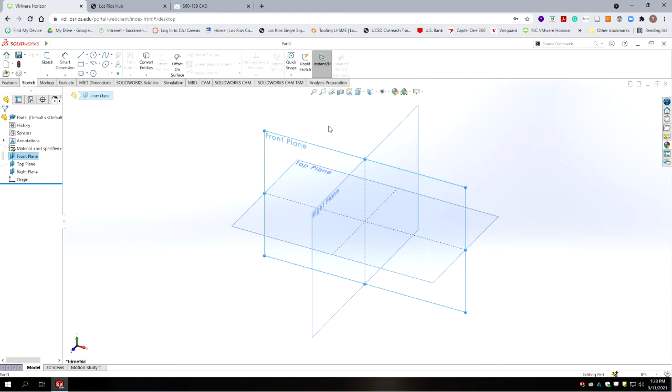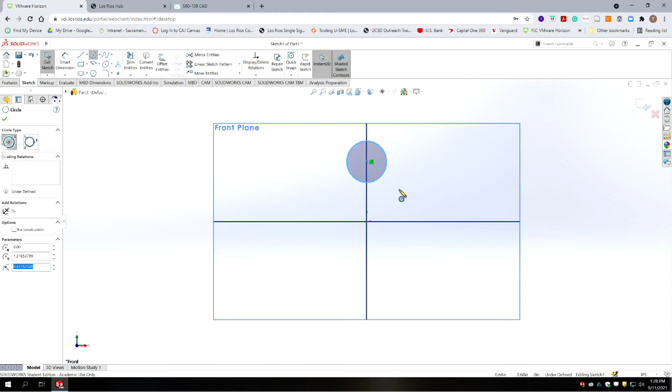Alright, so we're going to move on to the next step here. So let's open up SolidWorks. And we're going to create a new part file. And we'll make our planes visible. And we're going to sketch on the front plane as our primary. And I'm going to start with a circle. I'm going to put that circle up at the top. Okay, that's going to be top of our tapered part. And make sure it's snapped on the plane that intersects.

And then we're going to draw a line that intersects the base plane and comes up. And if you hover close to the circle, you'll see a yellow tangency symbol show up. We want it to be tangent. So hit escape, and we're going to duplicate that line on the opposite side. I found it's easier to get the tangency symbol to come up if you're not trying to draw the endpoint to the circle. So you go past and then we trim it.

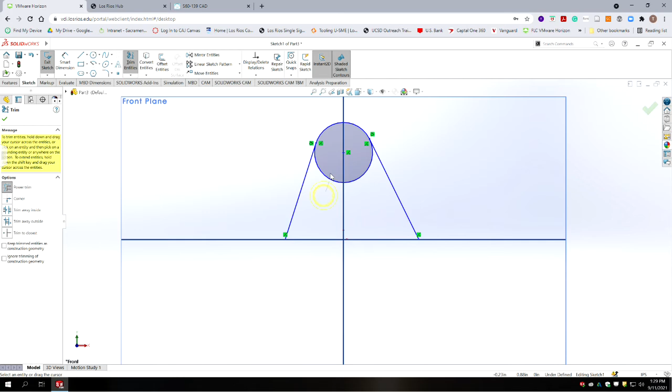Alright, so why don't we go ahead and do that. We'll trim off the ends of those little pieces. Okay. And I guess we could trim off the center too. Okay. Now, we want this to end up being symmetrical. So we already have the center of the circle symmetrical. If we put in a relationship between the two endpoints of the arcs so that they have to be horizontal, that's going to force the symmetry with the angle.

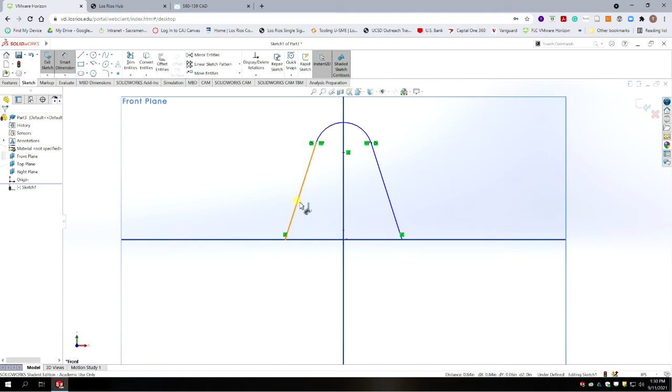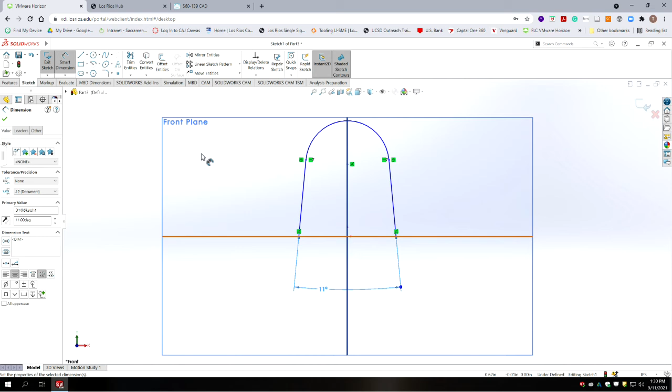Okay, and then we're going to put in our angle, which according to our drawing is 11 degrees. So we're going to type in 11 degrees. Okay. Alright, now I need to make a line from end of each of the angled parts, and we should get an enclosed volume. Now the dimensions are all off, but we've got basically our perimeter. Now we just need to put in dimensions.

So we're going to put a dimension on the radius here, and I'm going to go back to our drawing, and it's 240 thousandths radius. 0.24. It's going to get significantly smaller. And then the other dimension we need to constrain is however it's dimensioned to the height, and it looks like the overall height and the height of the center of the hole have a different level of precision. And that is partially because this could be made as a casting. So you wouldn't want to hold the outside position as tight as where the actual hole is.

So we're going to go ahead and use this 1.830 for this arc, but we want to make sure that we don't make a concentric relationship between the higher precision holes and that arc, because in reality we have a lot more freedom of tolerance on the arc, and they don't have to be concentric for the function of the part.

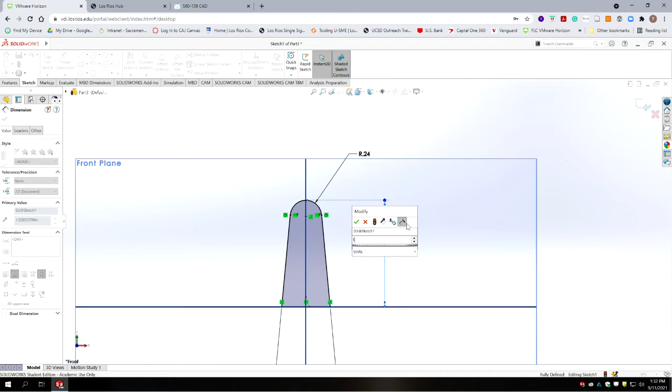Okay, so 1.83 is our height. We're going to go from the base, and then we're going to hold the shift key down, which allows us to select the tangency point of the arc. Otherwise it's going to go to the center. So we're going to do 1.830.

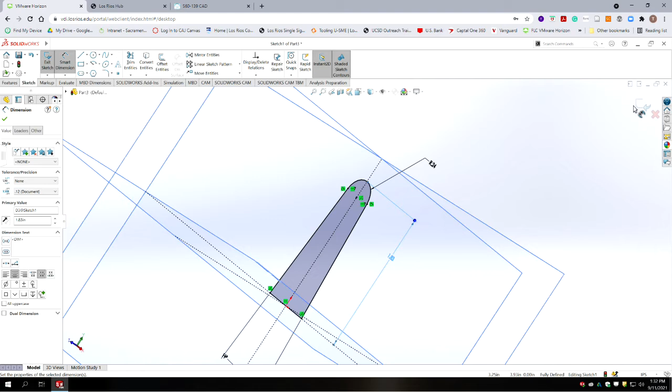And we get our overall height. Okay, so that's our base extrusion. And in this context, this time I want to have symmetry set up with the overall thickness of our extrusion. So we're going to hit accept, and we're going to highlight the sketch. We're going to go to features.

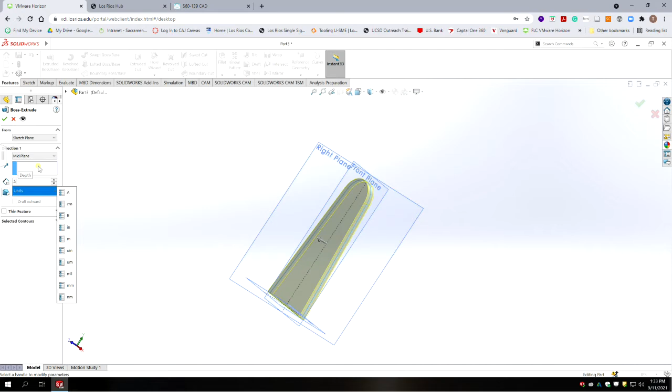We're going to do our extruded base, but instead of doing blind, I'm going to say mid-plane. So it puts the center of our extrusion on the plane the sketch was drawn on. And then we're going to put in our thickness of a 1/2 inch. And so the overall thickness should be a 1/2 inch divided on a midplane. Okay, and we're going to accept that extrusion. And now we have our base extrusion for the part.

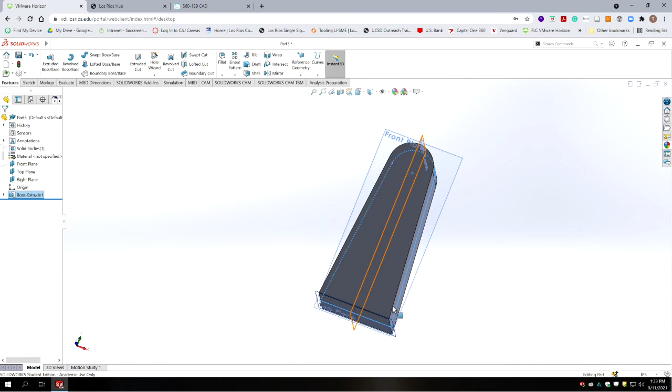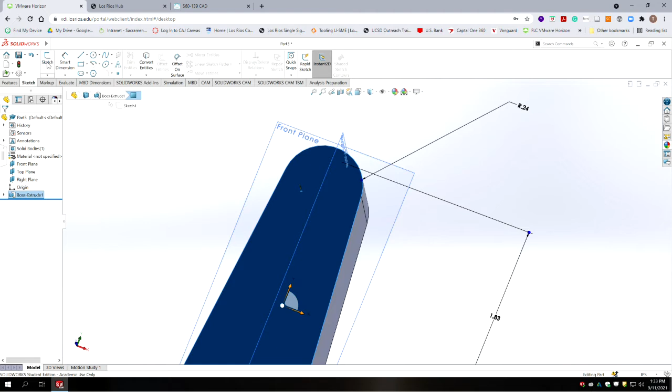Now you could choose to approach this by doing a variety of different things. We can put the hole through the front face, or we can put the holes in the end. I'm going to finish off what's in the front view, and then we'll work on the back view and then the base. So we're going to go to sketch, and we're going to select the front face of the part itself and the sketch tool. And let's look at the model straight on.

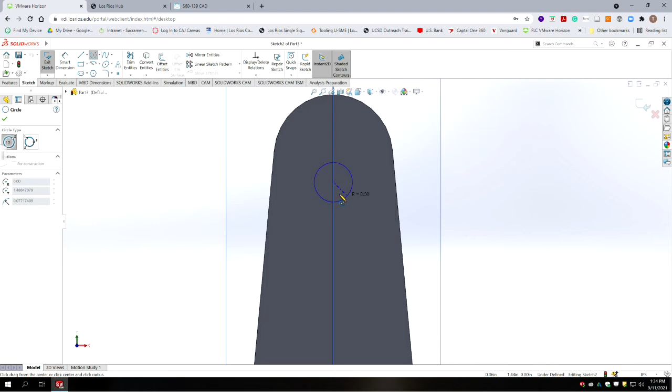And I'm going to draw a circle, and I'm going to place it so it center lines on the vertical axis. But you notice I tried to avoid having my selection. I made it intentionally not concentric because I don't want to build that relationship in. Because the way the tolerances work out, that hole doesn't have to be concentric. Okay, but it has to be on center line, and we need to put a diameter on it, which was 250 thousandths. So the diameter is not that critical.

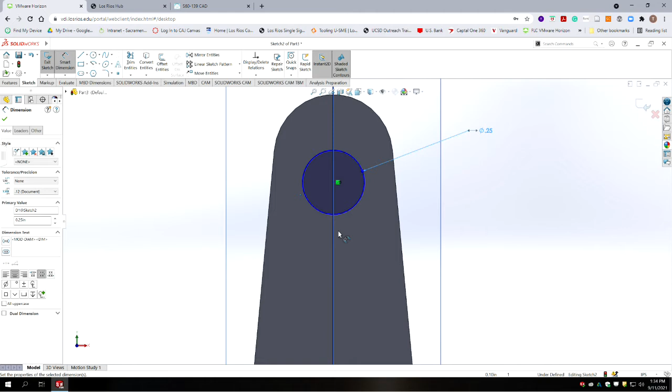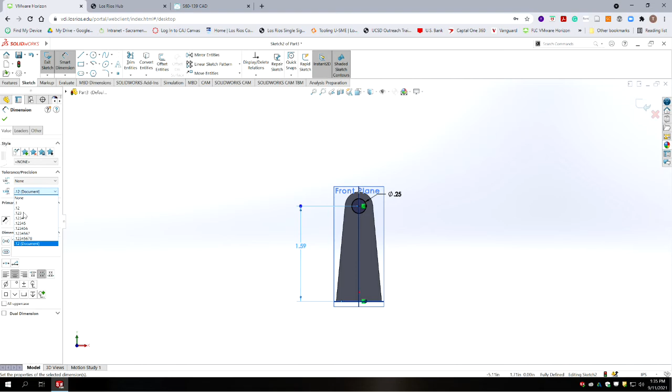And then we need a dimension from the center of that circle to the base. We're going to click off to the left, and we're going to reference our drawing. Our drawing says it's 1 inch 594 thousandths. Okay, and we're going to change the number of decimals, significant digits, so we can see that. And we've got our 1/4 inch hole.

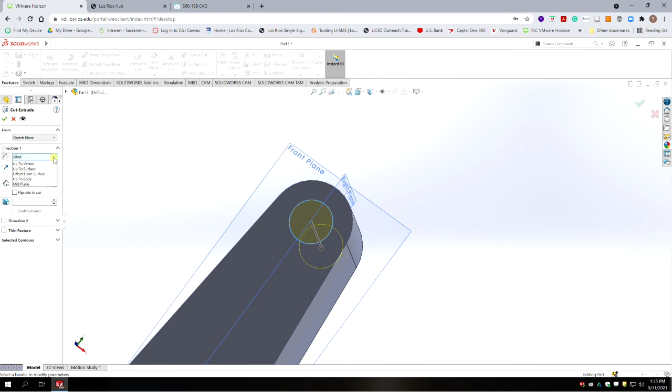Okay, so now we're going to rotate to a 3D view so we can see what's going on. We're going to do a feature. We're going to do an extruded cut. It's going to be through all. And we're just going to go the one direction and hit accept. And there's our 1/4 inch hole. On our drawing, concentric to that hole is a hole that's 375 to 373. So halfway through the tolerance on that is 374.

So we're going to make the one on the front face by doing a sketch. We're going to do that on the front face. Then we're going to make a circle. And we're going to pick up on the circle until you see the little dot show up in the middle. And then you're going to move over and select that dot, which makes it concentric. And we're going to draw our circle, and we're going to put a diameter on that circle of 0.374.

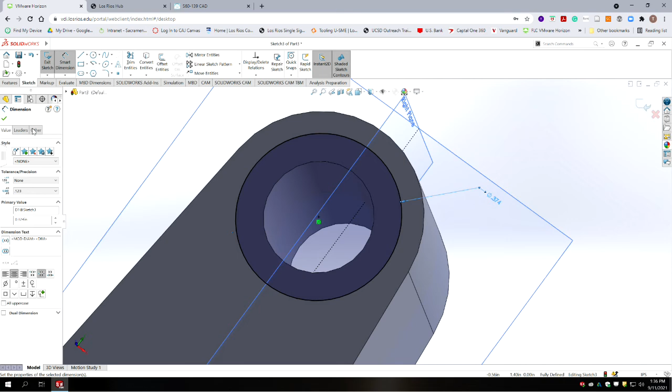And let's expand our tolerance to 3 places. And we'll accept that dimension. We have a fully constrained sketch. We're going to exit the sketch. We're going to make sure it's highlighted. We're going to do a feature. And we're going to do an extruded cut. And the depth of that extruded cut, according to our drawing, is 115 thousandths. So 0.115 is the depth. And we're going to accept the depth. Okay, that gives us a 115 thousandths counterbore on the one side.

Make sure you save. Now we need to make one on the opposite side. And we're going to use a mirror command. So we're going to mirror the whole feature. So if we select mirror, it asks you what plane or face do you want to mirror about. And because we made our part symmetrical around the front plane, we can use that as our mirror line.

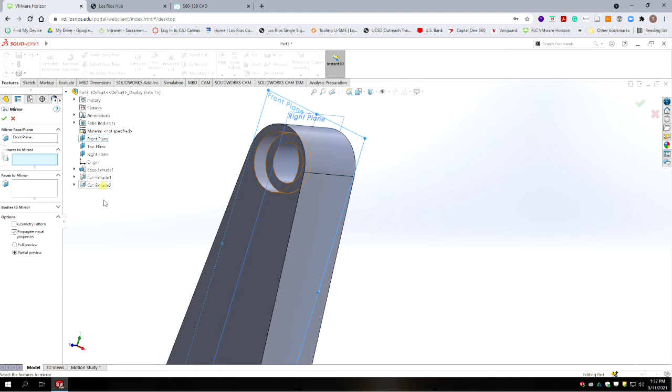Now it's asking what features to mirror. Now you can actually just select the feature, but to ensure you have the feature you really want, I would select it on the feature tree, and it'll show a preview of where it's going to go on the opposite side. And then we're going to accept the mirror, and now we've just created the counterbore that's identical in size on the opposite side of the part. Okay, make sure you save. We're going to now roll to doing the work that's on the bottom of the part.

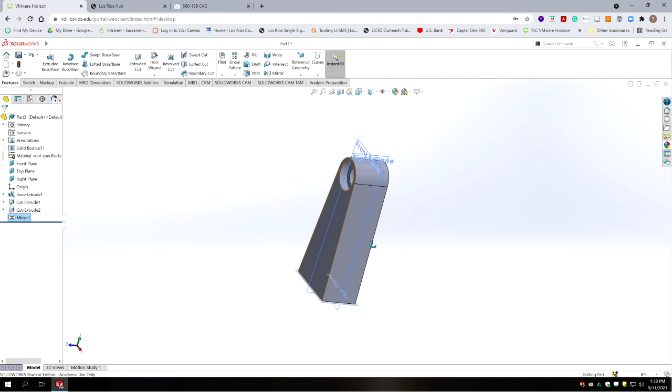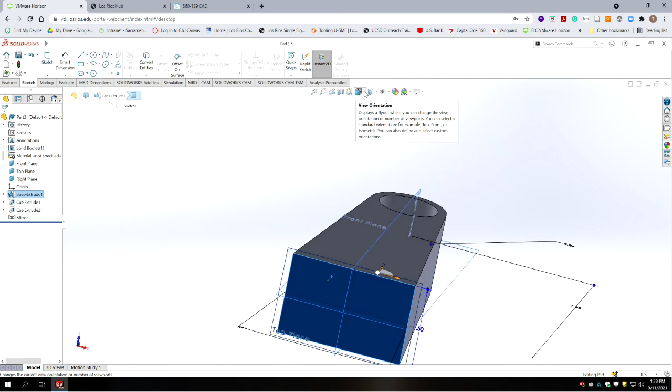So we want to physically look at that part in the same orientation it would be in the drawing. We got the front facing the front plane, and we want to draw our dimensioning scheme just like it is on the drawing. Okay, so we're going to do a sketch, and we're going to select the bottom of the part. We're going to look at the part normal to our sketch plane. And we need to make sure we dimension these holes the way it is on the drawing.

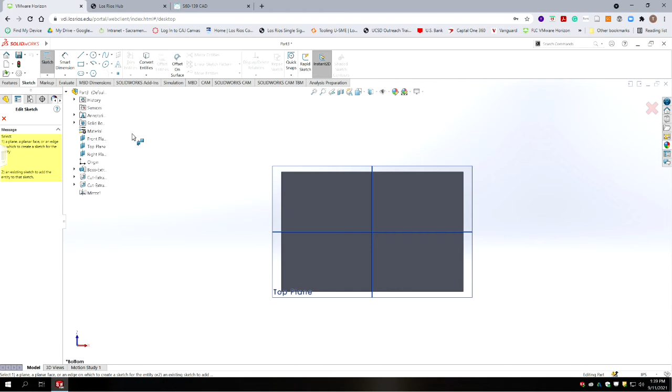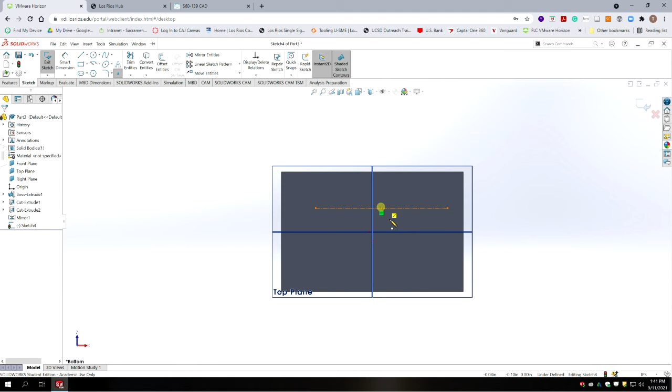Okay. So what I'm going to do is set up a sketch first. We'll use a combination of the hole wizard and extruded cuts to actually make them. Okay, so I'm going to draw a construction line. We're going to make that construction line horizontal. Okay, so we're going to use the point command, and we're going to hover over the center of our center line. We're going to put that point right on the midpoint of the line. Now, that is for us to use the hole wizard on that point.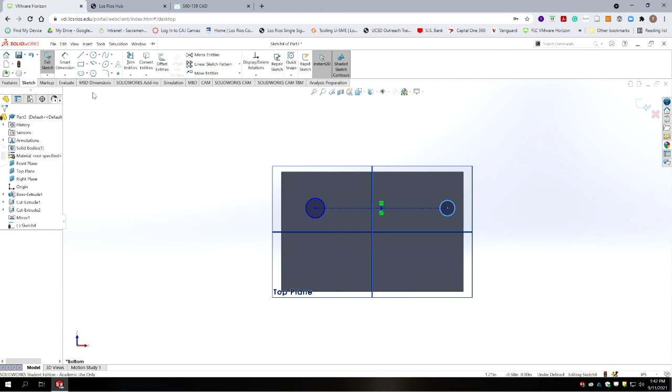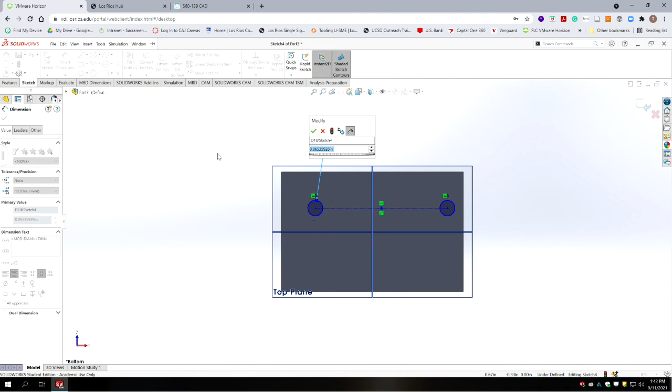Now we're going to draw a circle on either end of our center line, and that is going to be for a standard extruded cut for our 2 dowel pin holes. We're going to highlight both of those circles, and we're going to make them equal in size, and we're going to dimension one of them. And according to our drawing, the dowel pin hole is a 123 to 124. So we're going to shoot right in the middle. It'd be 123.5 for its diameter. And let's expand that to 3 decimals.

And now we're going to put in dimensions. Okay, so we got our dimension in our drawing. Shows we have a dimension going to the center hole. So we're going to go from the center hole to the edge of part. We're going to drag that up, and our dimension is going to be 394 thousandths. We'll expand the tolerance to 3 places. And then from the top edge, the dimension to the center of that hole is 250 thousandths, a quarter of an inch.

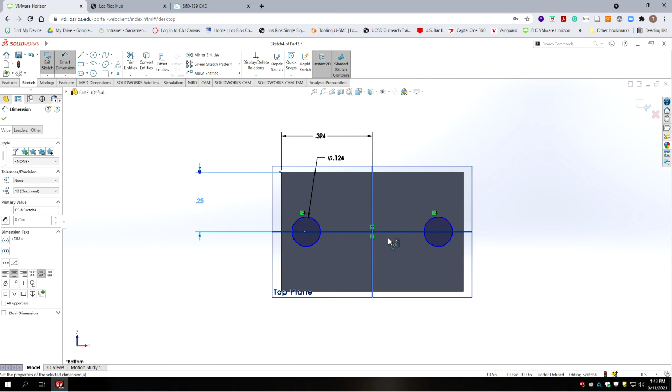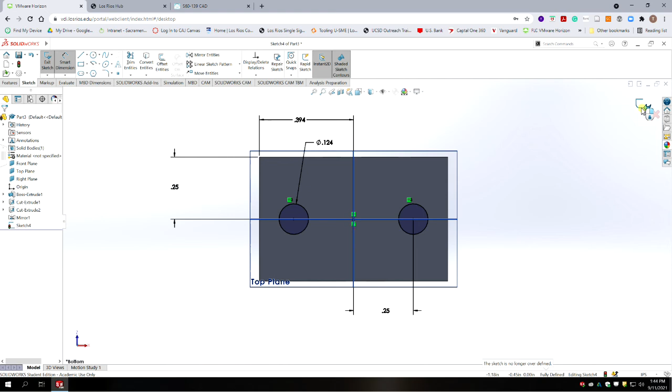Then they have a dimension from our center hole to the hole on the right as being 250 thousandths. Alright, so let's exit this sketch. And we're going to look at it in a 3D view. We're going to shut off our planes. So we hide the plane so we can see just our sketch.

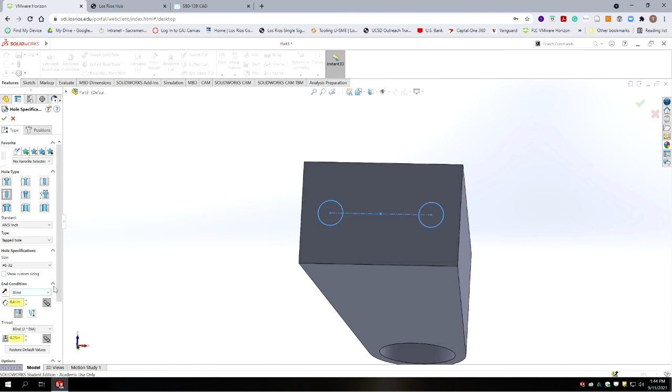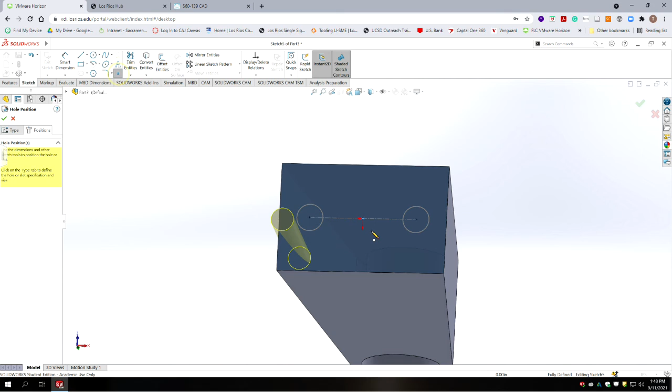Okay, so I'm going to go to Features, and we're going to make the hole in the center first. So we go to the Hole Wizard. We still have a threaded hole, and it's going to be a tapped hole. And we want 6-32. It's going to be a blind hole. And our depth of our threaded hole is a 1/2 inch, so 0.5. Okay, and then we select the face of the position of the threaded hole. And it's coincident with the point, we select the point. And accept. And we have our 1/2 inch deep 6-32 tapped hole.

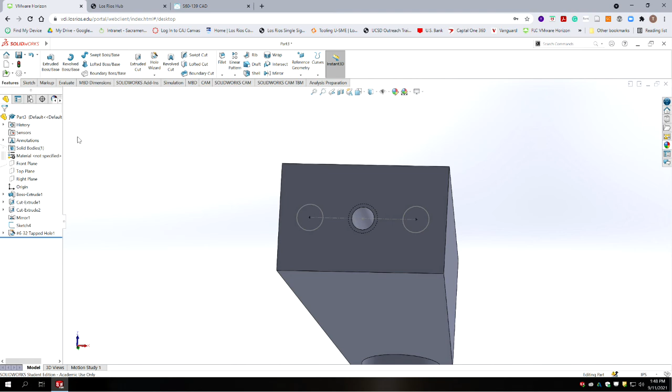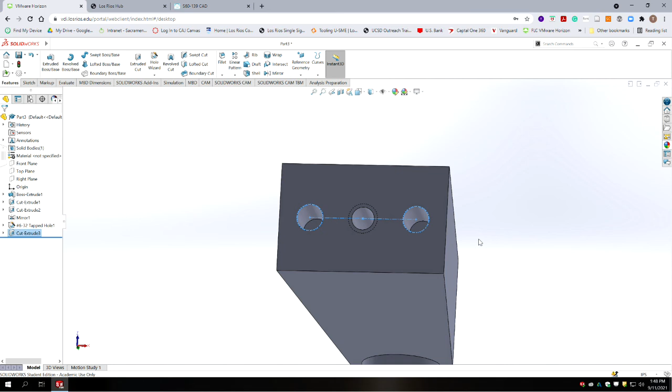Alright, so we're going to exit that command, and we're going to use the same sketch we used here to create the two dowel pin holes on either side. And so we're going to go to Features, Extruded Cut, and we're going to expand out our sketch, and we're going to select the entire sketch. And it's a blind depth of 250 thousandths according to the drawing. And we'll accept that. And now we have our two dowel pin holes for press fit steel pins.

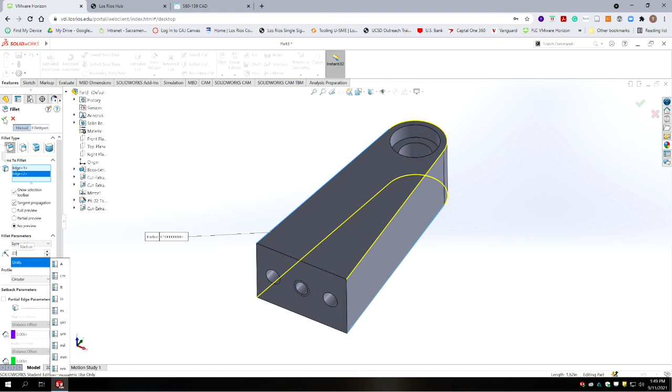Alright, we pretty much have this part done. All we have left is a fillet to put around the outside. So if we look on the drawing, it says fillet radius is 0.03 typical. So that's typical where they're shown. So we're going to go to Fillet. We're going to select the items to fillet, which is a chain of the top and the bottom. And we're going to set our fillet at 0.03, which is 30 thousandths. And we have our fillet features. Keeps it from being a sharp edge.

Okay, that's it. That is everything you need to develop the S60-139 part. Now we're going to move on to a similar steel part. It has more features in it, quite a bit more complicated, but hopefully that'll go pretty smooth. And it uses the same pinhole patterns that are in the bottom.